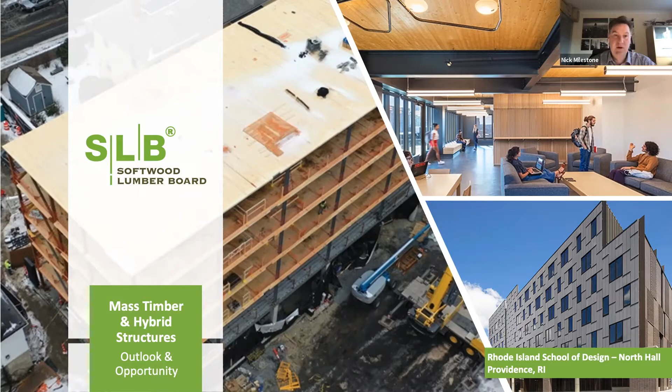My name is Nick Milestone. I'm the Senior Vice President for Strategy and Partnerships. I've been in construction now for over 35 years, spending 15 years in the off-site world of structural steelwork and the last 15 years in mass timber construction, both here in the UK, in Singapore, and in the United States.

And here's a photograph that kind of explains my journey in life, where I've enjoyed low carbon construction, the use of mass timber, and using it in a hybrid construction. What is notable here is structural steelwork and mass timber are designed, manufactured, and installed within an eighth of an inch tolerance, which makes both materials symbiotic of each other.

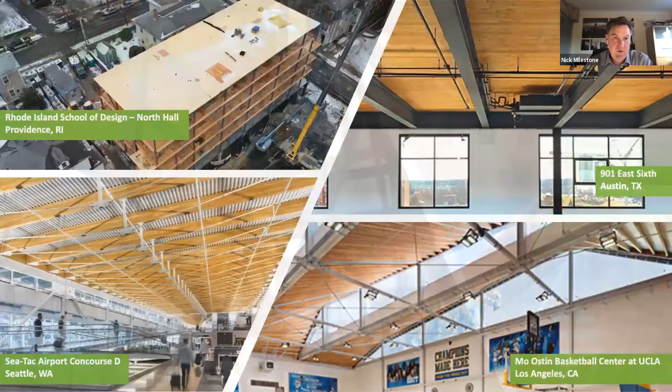We can see the development of hybrid structures in the US market, the Rhode Island School of Design, the recent SeaTac Concourse D at Seattle Airport, the use of glulam and steel to create a truss. And on 901 East Sixth Austin, Texas, the use of structural steel frame with mass timber as the floor construction.

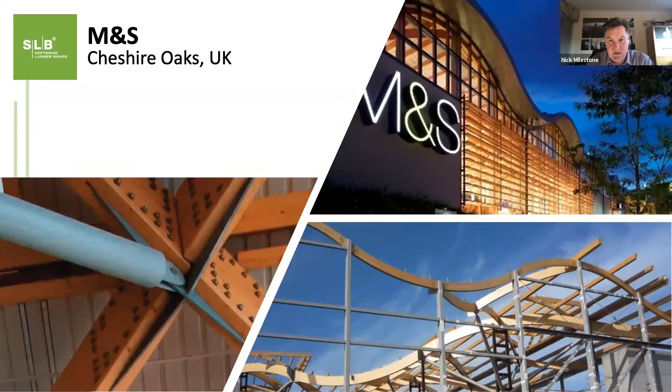The journey started for me around 2006, 2007 with the retailers in the UK wanting low carbon construction without compromising cost, thus the development of a hybrid structure which delivered both cost certainty and net zero carbon construction. We're starting to see projects around the world, notably the Mactan Airport in Cebu in the Philippines, where we can start creating form, curve and beautiful structures evolving with mass timber and hybrid construction.

But what's really made the journey so exciting and accelerated the journey over the last 10 years is the use of VDC, the digital twin. This creates the integrated digital delivery offsite virtually, which allows us to work in federated models where we can create models that are incredibly efficient and clash detected, which means when we come to do the actual construction, it's a lot more efficient.

This takes advantage of the use of mass timber and light timber frame because we're in the realms of design for offsite manufacture and assembly, which involves green and sustainable technologies in building structure and the building physics and envelope, involving mass timber, steel and concrete. Thus, we create the hybrid material integration for site construction.

We're starting to see iconic buildings now being constructed in the US, notably the Catalyst building, which was a 150,000 square foot institution building for Eastern Washington University, by the use of glulam as the beam and stick solution with mass timber as the floor construction. Not just the cores and the lift shafts using mass timber, but also the pre-panelized external fabric using mass timber as well, developed offsite as a non-load bearing through wall solution.

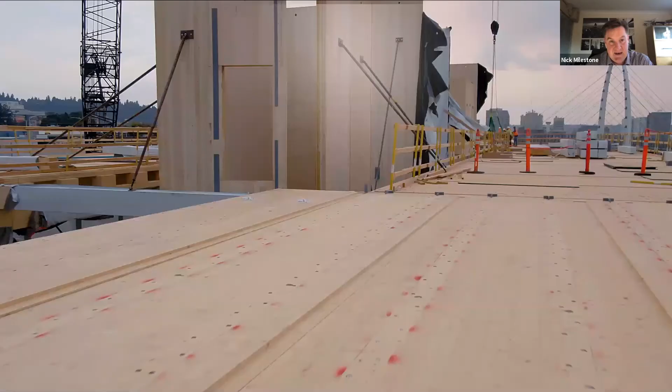And here we can see how that works in a zero waste environment when we overlay the actual VDC with the actual construction frame itself. This was courtesy of Katerra, who built this project in 16 weeks as a structural core and envelope, which was a great success. But mass timber is not new.

It's been in existence since 1866, especially glulam, which was commercialized in Central Europe in 1906, and glulam was first used in the United States in 1934. What's really disrupted the market is the coming to bear of cross-laminated timber from Central Europe, which was first used in the 1990s in the Austrian housing markets. It's been used for some years in the US market as an industrial mat. For the last 5 years, since 2016, it's now being used in the construction sector.

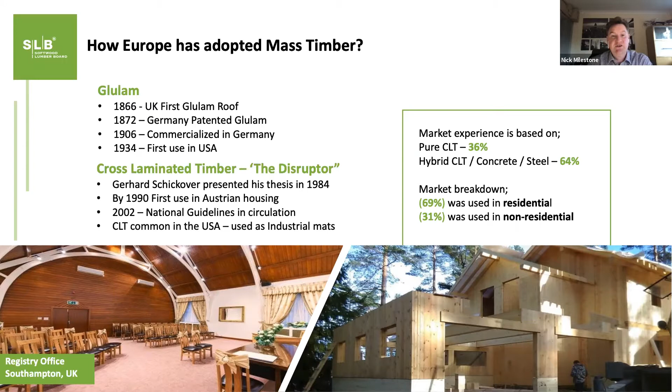When we look at the buildings constructed around the world, only 36% are pure CLT or mass timber buildings, whereas 64% are a hybrid use of mass timber, concrete and steel. When we look at the market breakdown, 69% are in the residential accommodation sector, whereas 31% is in the non-residential office and institution building typologies. Now, the impact of different building systems gives the great proposition for softwood. So why is the lumber industry interested in steel and concrete hybrid buildings?

Well, from the overview you can see here, of the different building systems and types, the focus is on the amount of board square foot opportunity for the softwood lumber industry. So construction of single family detached homes has traditionally been the largest source of softwood demand in North America. But pre-pandemic demographic shifts and the socio-economic changes favor growth in multifamily construction.

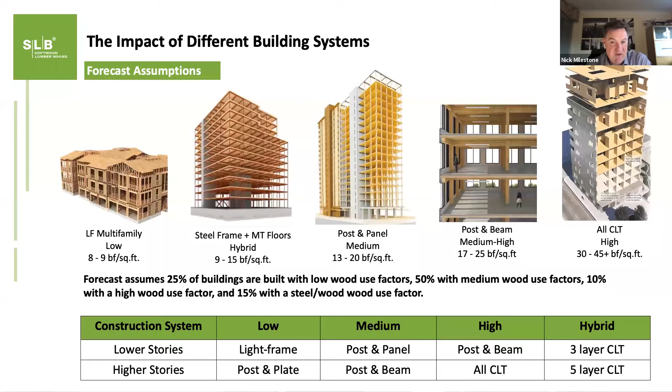So what we've done is built the base case as a blended approach to the construction system used on whether or not a wood core can be utilized in that construction system. So our forecast assumes 25% of buildings are built with low wood use factors, 50% with a medium wood use factor, 10% with a high wood use factor, and 15% with a steel wood use factor.

To realize the potential demand available in the US, the softwood lumber industry must adapt to these ever-changing markets and frame softwood lumber's value proposition around the present economic and market needs of design and construction professionals. Strong growth in taller residential and larger mixed-use buildings is expected to continue as North American cities increase density and encourage more livable community construction in urban core areas. This trend is both a threat and an opportunity for wood producers.

It is a threat because steel and concrete construction has predominantly dominated building at greater heights than 6 stories. But it can be an opportunity if the building codes become more inclusive of wood and hybrid structures, which is why the IBC 2021 codes do allow for this, and wood systems are developed that can compete with steel and concrete for larger and taller building constructions.

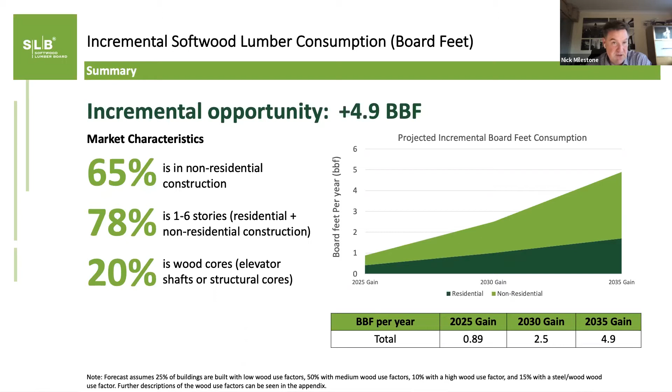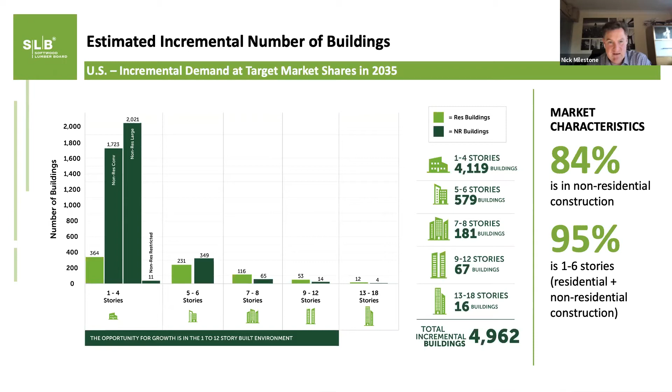So what we see is by 2025, there will be approximately 745 buildings per annum using some form of mass timber. By 2030, the gain will be around about 2,400 buildings per annum, but by 2035, we see this just under 5,000 buildings per annum in the US. So this is a great demand curve for US softwood lumber.

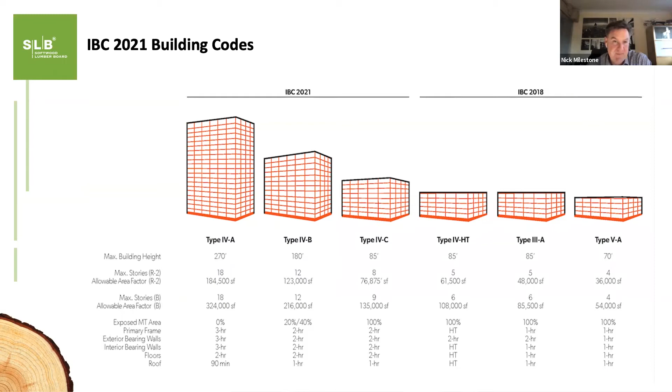So what we can see now as a snapshot is the fact that light timber frame is working with CLT as a floor plate, NLT and DLT. We're starting to see structures above 6 stories, predominantly done in concrete, now going to CFS using steel studs. This is a great case for incorporating mass timber as the floor construction.

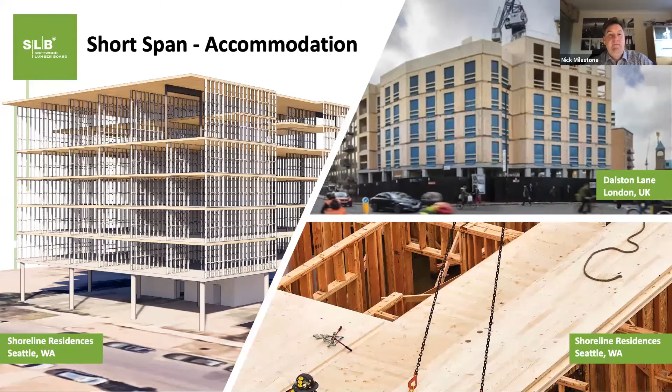There is the use of load-bearing mass timber. That's more seen in the UK and Europe, but with the development of steel studs, this will make a far more economic advantage and value proposition to developers.

The long span market in the offices, we can use glulam, beam and stick. Typical spans around 25 by 25 foot. The use of structural steelwork in the same place, we can achieve spans of 25 by 42 feet, which means we can use shallower beam depths, bigger spans, but still using mass timber as the floor construction.

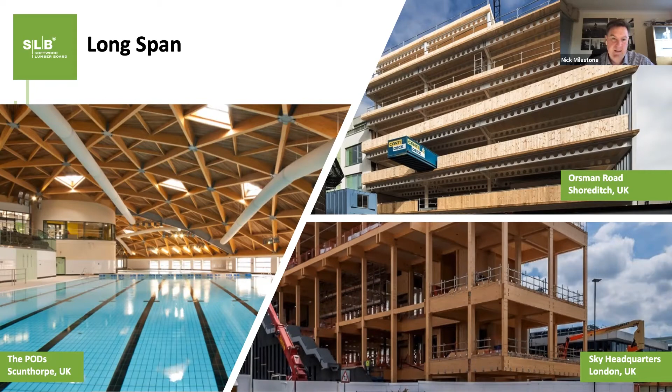I mentioned about how VDC works. It starts with the Revit model. Now, the Revit model can then be transposed down to the actual structural element analysis and the actual files themselves to create the CAD/CAM files for the machine data in automated production. So predominantly the steel and concrete industry uses Tekla. The timber industry from Europe is using CADWorks or HSBCAD.

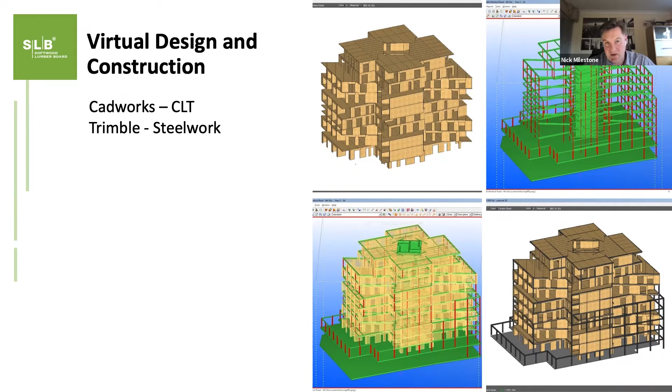Now they can come together with IFC file integration. Now the likes of Tekla Trimble are taking that to the next level to have one structural detail model that can incorporate steel, concrete and timber, which starts to make the whole journey far more seamless for hybrid construction.

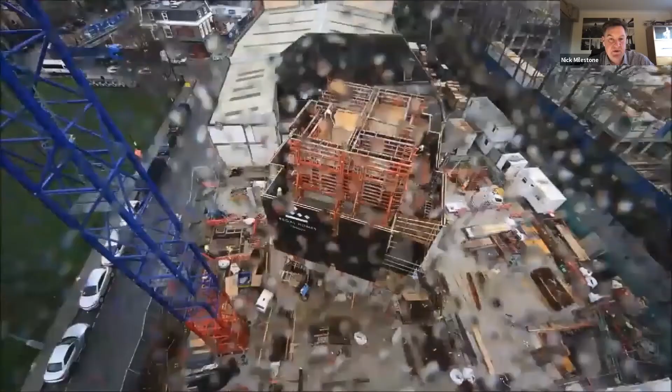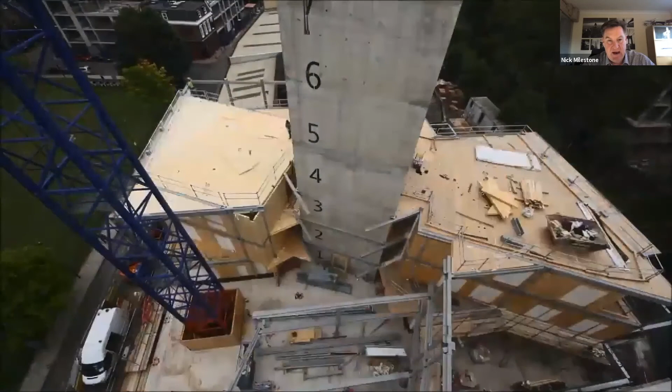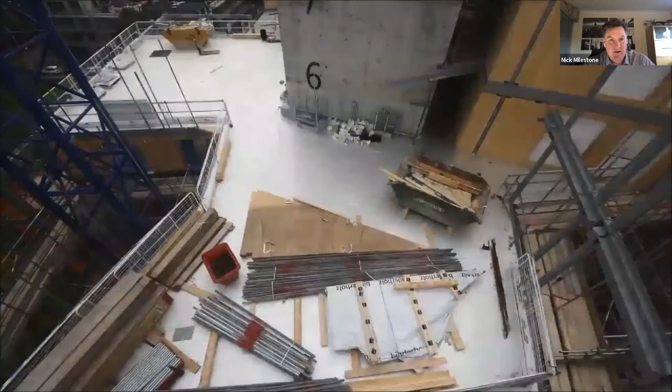So if we take this building, the Cube, this was a 9-story over two stories of podium concrete with a concrete core, and then the adoption of putting in a structural steel frame and mass timber being used as both the floor and the wall construction, predominantly for the diaphragm action, both horizontally and vertically. Now, this building was constructed, just the timber and the structural steelwork, in 28 weeks using 5 men and 1 tower crane, which makes it very, very efficient.

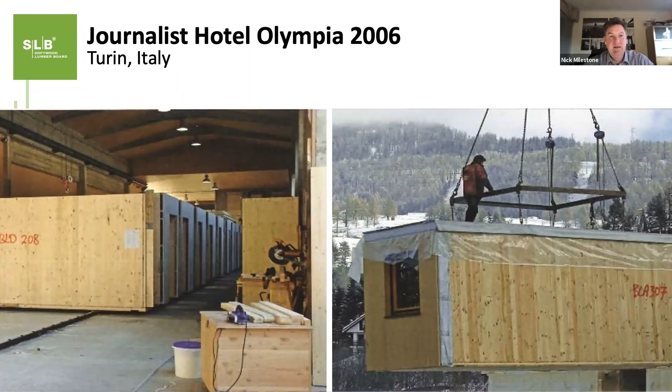The UK construction model now has matured into a steel frame and CLT floors. We're seeing that more and more in the mid to high rise offices in London especially. So when we start looking at the future of mass timber, is the whole modular volumetric approach of having boxes or chassis being built off-site for student accommodation, for hotels and some residential developments. This has already been in existence in Europe since 2006 with the Journalists Hotel at the Winter Olympic Games.

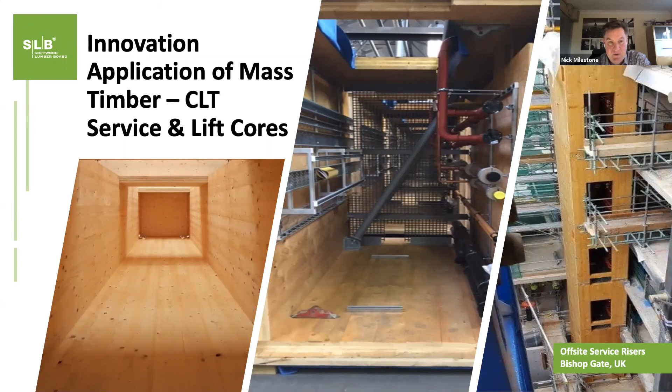We're starting to see the use in mass timber service and lift cores. If you look at the service core, you can see the integration with mechanical, electrical being pre-installed off-site to make construction a lot quicker on-site.

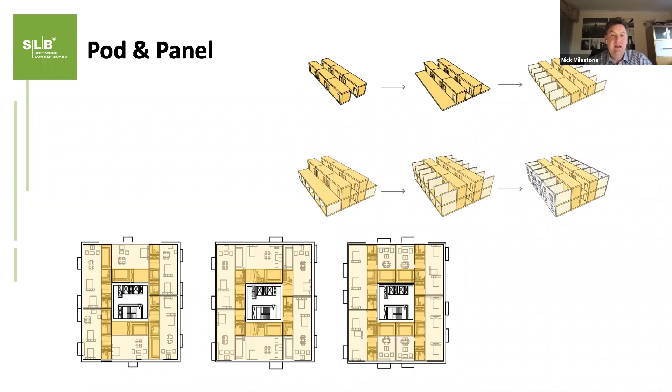But where we're starting to see the market going much, much more is the development of load-bearing pod and panel structures, where we can use either light timber frame or mass timber used in the load-bearing pods. We can start using the floors, walls, and internal, external walls adapted with mechanical, electrical, and through-wall solutions with mass timber. This is how we will start to see the evolution in the short span accommodation market.